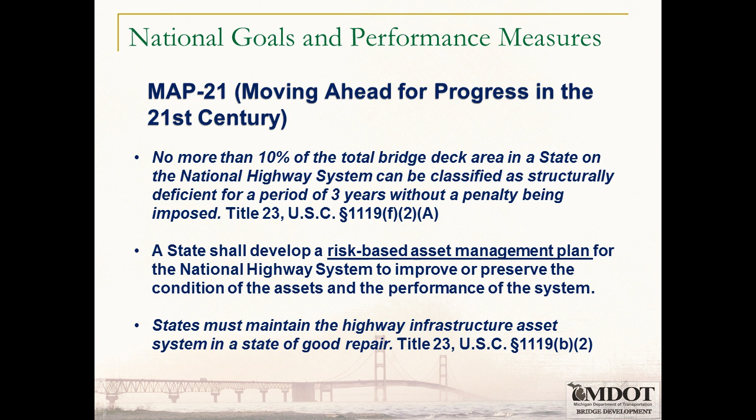And then the terminology: we must maintain our bridges in a state of good repair.

But since FHWA, with these national performance measures, they're going to start talking about fair bridges too. That's really good news, because it's us managing those fair bridges. And that's what I'll be talking about a lot today.

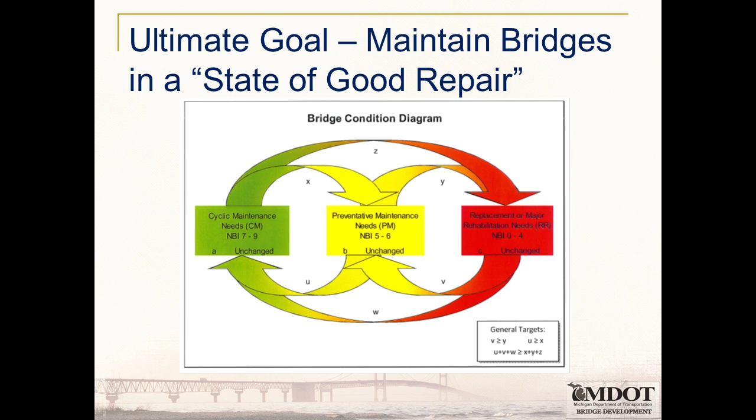I'm going to talk a little bit about how, if you're doing good asset management, someday somebody's going to ask you - you can put the money in the templates and then you pick the projects, and somebody's going to ask you, well, what's your methodology for picking these projects? How are you picking them the right way so it's the most cost effective? And remember, MAP 21 said risk-based asset management.

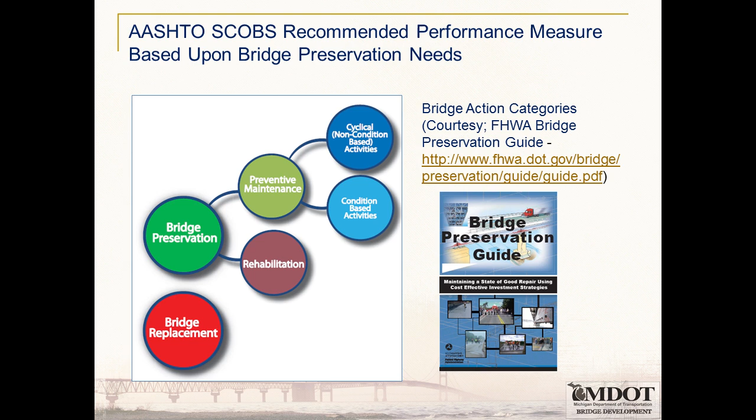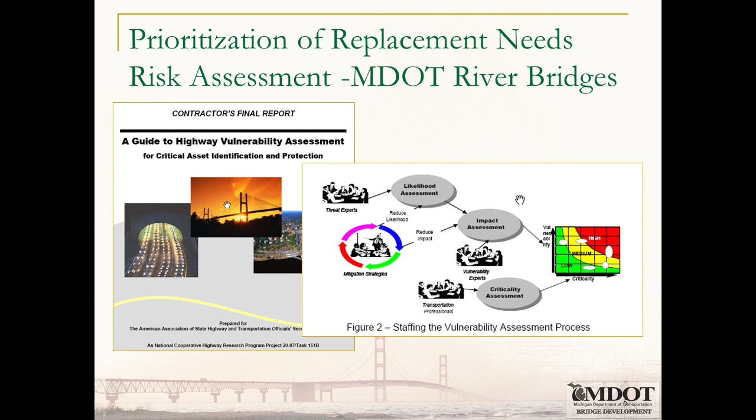So to me, when you talk about rehab replacement needs, risk-based fits in very, very well. This is some of the things we do - we follow the guide to highway vulnerability assessment for critical asset identification and protection. That was an AASHTO guide. I really like it, and it's where you start talking about your asset, its vulnerability and its criticality to the transportation system.

Each year we have a thing called our 5-year call for projects, where we're a decentralized state - we have 7 regions, but we control it centrally by giving guidance and setting goals each year with the regions. We write a call letter, and then the regions pick projects based upon the instructions there.

For our R&R program, one of the things we require, and in the central office we help them out, is for all of our poor bridges over rivers right now, particularly an evaluation for scour, we do an assessment - a vulnerability assessment of that structure. It'll get a score for vulnerability, which includes item 113 scour rating, number of substructures in the water, footing type, skew angle, channel protection, soil type, scour mitigation, overall condition of the structure - all these things that show you if that structure is at risk.

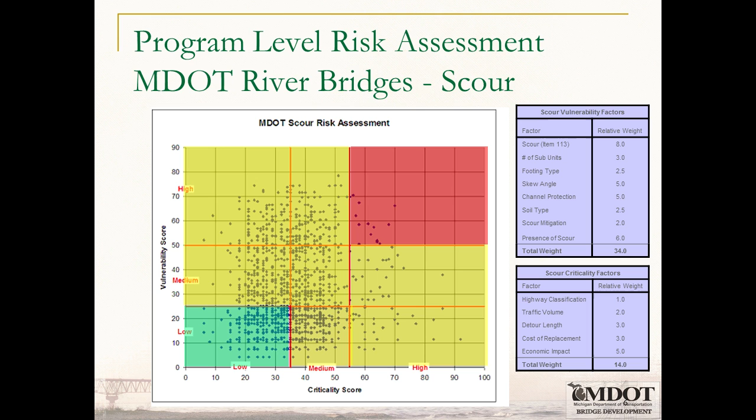And then the criticality score - how critical that structure is to your system. For example, highway classification, traffic volume, detour length, economic impact to the community. So if a structure is rated both highly critical and highly vulnerable, our region has to say, why aren't you working on that? It's really prioritizing that action is taken on those structures to reduce their vulnerability. That's how we prioritize, or partially how we prioritize, our R&R program.

Now let's talk about - in Michigan, 20% of our program goes to preventive maintenance. It has for years. We very much believe in it. It's been a tremendous help in slowing our deterioration rate, which I'm going to show you some charts on. But how do you prioritize PM?

Now, I love to talk about Markov transition probabilities. This is where the geek in me starts coming out. It sounds overwhelming, it might be a little scary, but actually it's super simple, and the way we do it is just so easy. I just want to take a little time to show you how we do it. It's simple counting, and we're doing it with the NBI.

For example, in this slide I'm showing our 2009 and 2010 inspections, and I highlighted yellow our 5s because we're going to be talking about how we prioritize our 5-rated bridges for these PM projects. Our sample size is 904 bridges. Of those, 56 actually had the condition state go up, so we're assuming we did a project, and we pull those out. Out of those 904, 879 when we inspected them in 2010 were still a 5. So our transition probability is 97.23% that it stayed the same.

And so we can do the same thing about the probability - we count the number of bridges that went from 5 to 4 and 5 to 3, and then we have corresponding transition probabilities there. Now there's an equation - this is the toughest part, but just a simple equation that converts transition probability to the average number of years it takes to reach the next condition state. So 97.23% equates to 24.7 years. And if you take your NBI scale...

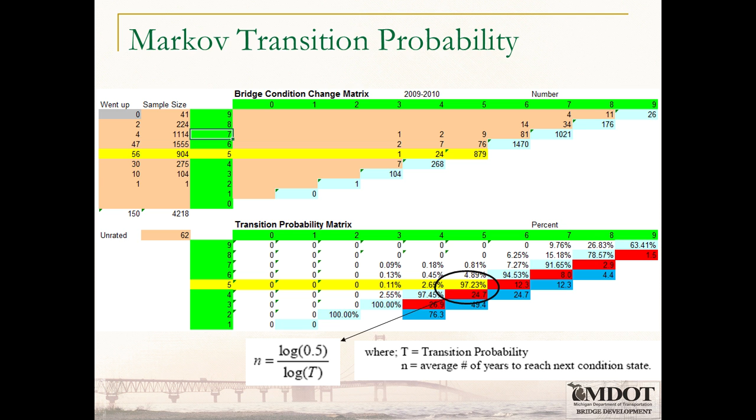...and you do this for each one of those, on the next page you produce a deterioration curve. We've been doing this for years, and I just want to show you a number of different curves to show that intuitively these make a lot of sense. There's things you can do with these curves - one of the things we do is show our time to poor. Here I'm showing the time from a structure being new until it reaches poor - in this case, you can't read that there, but that's 49 years.

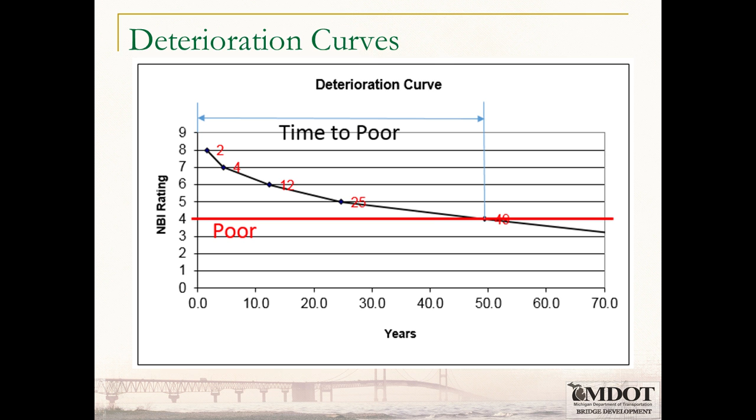So in pavement in Michigan - I think in other states they have a thing they call remaining service life - this is very similar to that. I like the term time to poor because we do have service life even once one of our major components of the bridge does become poor. I'm going to show you a few examples of how we've been doing with this. 5 years ago, and it's available on the internet, we have a report where we were curious to see how our reinforced concrete decks with epoxy-coated rebar was doing.

We did that report in 2010. I was pleasantly surprised that we started doing epoxy-coated rebar in 1981. We could not find a single bridge deck surface that had deteriorated to poor. Because we do both an NBI rating of the deck surface, the bottom surface, and an overall deck rating. The deck surface deteriorates the fastest, and we couldn't find a single bridge where the deck surface had become poor. So that's good news, but our transition probability curve couldn't really extend beyond that point, other than drawing a dashed line, because we simply didn't have the samples after all those years.

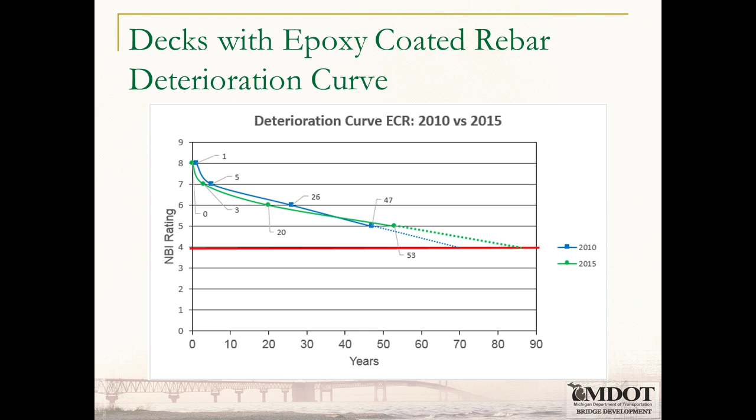So we just repeated it this spring, and in blue is 2010 and green is 2015. There's two things I find kind of cool here. One is the repeatability of using these transition probabilities to do this curve, because its 5-year average was like 2005 to 2010 and 2010 to 2015. Look how similar the curves are. And the good news for us, we still don't have a bridge deck with epoxy-coated rebar that has gone poor. I know there's issues and controversies, and some in Florida and Virginia are saying dire things, but we're certainly not seeing it. So that's good news, and it's also a good use of this curve, which I really like.

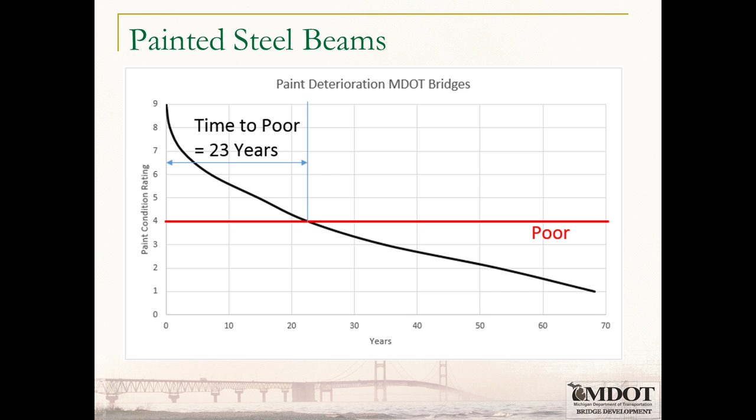We are doing these curves for a whole bunch of things. I won't bore you by showing too many of them, but another one is for painted steel. We have a paint rating, an NBI 0 to 9 rating for the paint system on a bridge, and we find that the time to poor for painted steel beams is 23 years. Again, intuitive—you look at that and say, yeah, that makes sense. I can believe that.

Now for our three major elements, we've checked from 2000 to 2004, 2005 to 2009, and then 2010 to 2014, and drew these deterioration curves. Now here's the good news—this, more than anything, I think, shows the value of preservation, because you see a deterioration curve in 2000 to 2004 in red, then in purple, 2005 to 2009, 2010 to 2014. As we've gotten better at preventive maintenance, our deterioration rate has clearly slowed, and that's really good news. I was really happy to see that.

This is something we should continue to do. In fact, in Michigan, some of our priorities have changed a little bit, and we got some big mega projects that are kind of gobbling up all the money, and our PM program's taking a hit. So it'll be interesting to see in the next 5 years how it shows up in these curves.

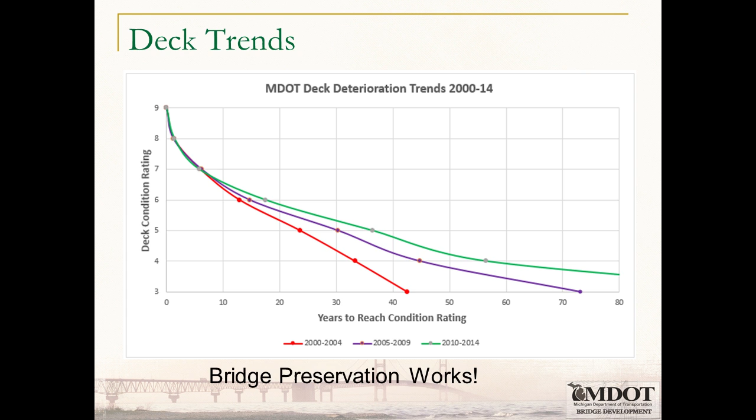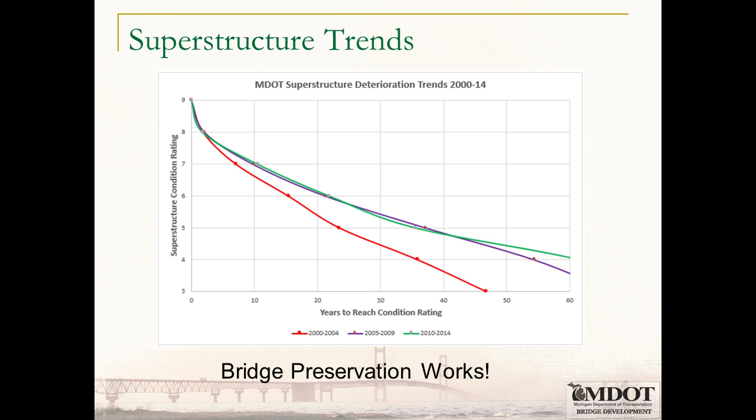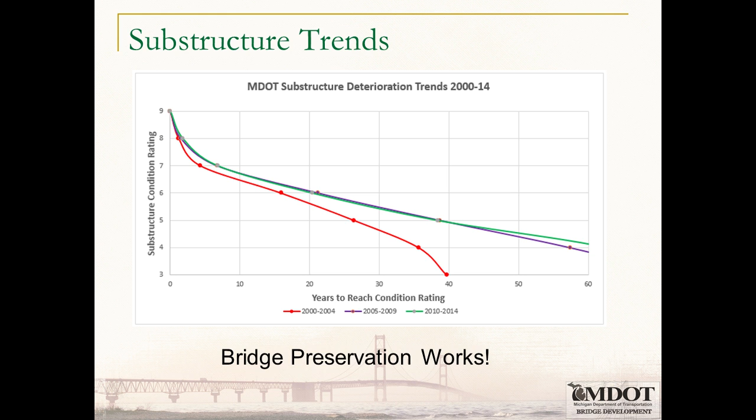The same type of thing was done for our superstructure. We made quite an improvement in our deterioration curve from 2000 to 2004, and it's been holding steady since in 2009 and 2014. A similar thing for substructures. So again, super simple thing to do—anybody who's got your NBI ratings can do this. We're happy to share our spreadsheets on how we do it. You'll find it's really quite easy.

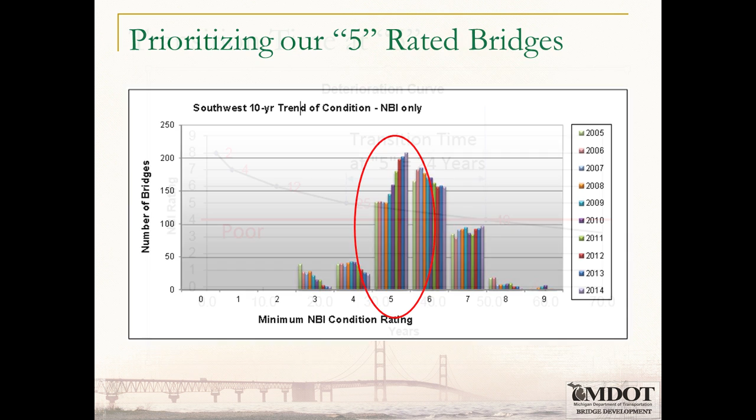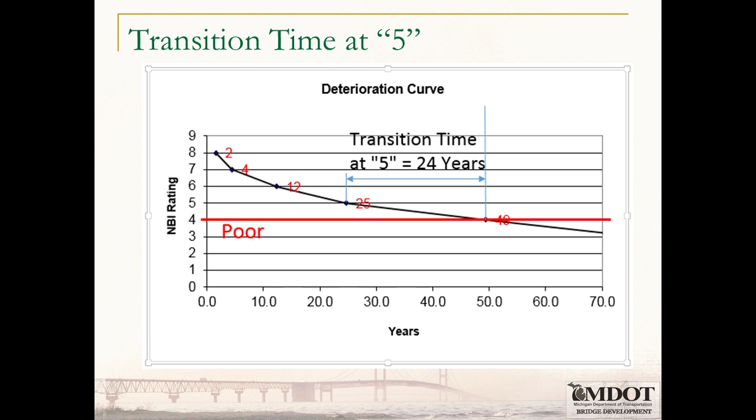Now, here's how we developed a method for time to poor, for prioritizing our PM projects. You can see our transition time for our 5s is about 24 years, shown right here. So a bridge will linger in a 5 condition state on average for 24 years.

Now, what we did—and it gets more complex than this—is we took all the different types of decks, the different information we have, some of it being element level, and tried to estimate how long that particular type of deck will linger as a 5. How you use that: say you have a bridge that became a 5 in 2005. In 2015, our current year, we know it's about 24 years before it becomes poor, so we can estimate for this particular bridge you've got 14 more years before it becomes poor. So the estimated year the bridge will become poor is 2029.

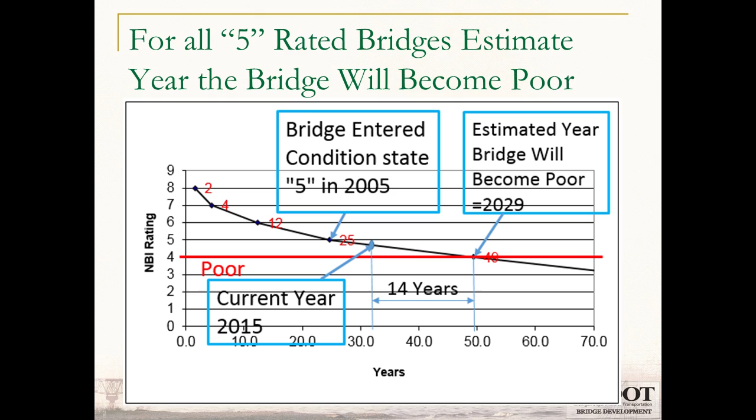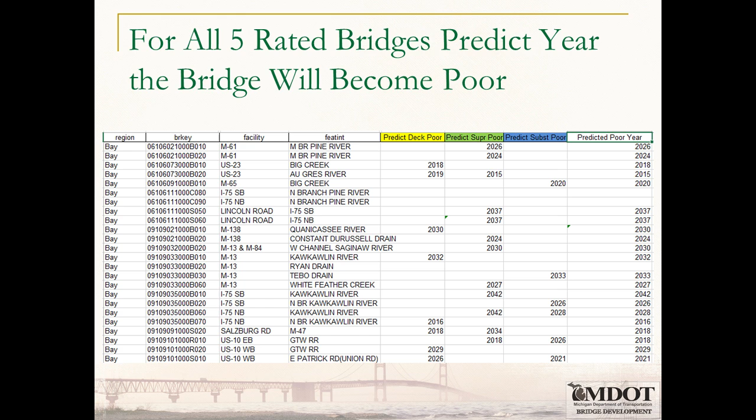For each and every bridge that's rated 5, we have subroutines that will calculate the predicted poor year. In our call for projects, we give this information to our region bridge engineers, and then they can sort it and identify the bridges that are going to turn poor soonest, so they can prioritize their preventive maintenance on that.

Again, it's a tool for our region bridge engineers as part of the call for projects. They follow our guidance in the call, and we provide them the management tools which I just showed you. But very frankly, that's just a tool they use. Another very big part on how they make good decisions is their personal knowledge of the bridges and inspector recommendations.

Another thing we ask our bridge inspectors is if you're rating that bridge and one of those elements is on the verge of becoming poor, report it to the region bridge engineer, and they get it right on a list.

Of course, what's the value of prioritization? It does steer you in the right direction, but the fact is when we do preventive maintenance projects, we do them along corridors, so we might do 10, 12 bridges. And of course, we are and always will be little brother to the road program. So we need to coordinate, and there's a lot of efficiency. If you've got traffic control to take care of the roads out there, you're going to go out there and do PM on the bridges.

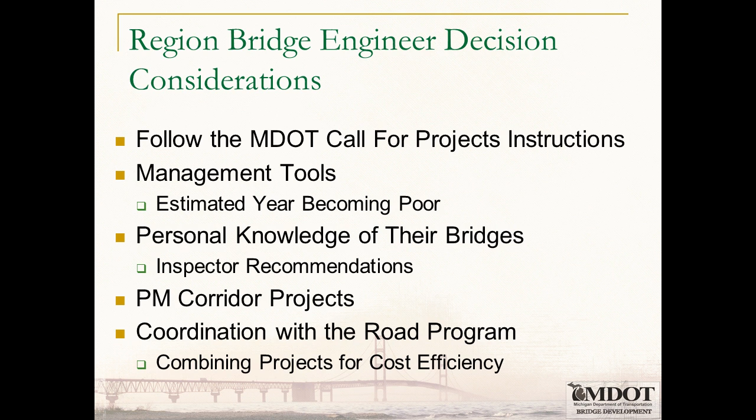This is an example again of our Southwest region. What they provide as part of the call for projects is they count up their bridges that are poor, and then the predicted ones that are going to become poor based upon the tools I've shown. And then they do evaluation on what they can do with these, which ones they just can't get to, and in the end, at the end of the call for projects, they show us what the end outcome is from their program.

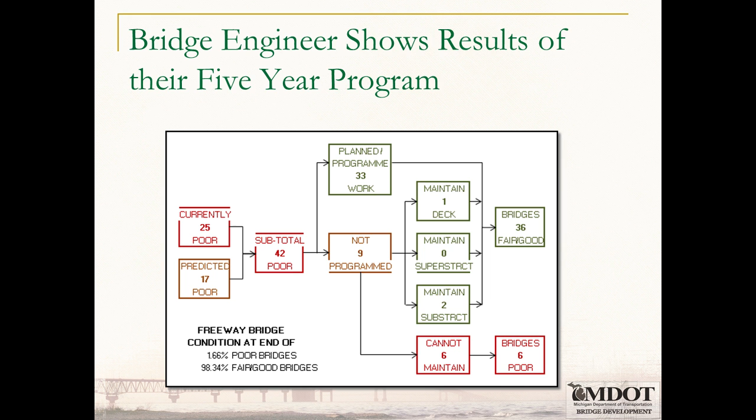Now, what I really like about this program is all of our region bridge engineers come into the central office. They do a report that they hand to us - that's their call for projects and selection of the bridges. And the coolest thing we do now, it's not reviewed by me. I don't even review it anymore. It's reviewed by their peers, the other region bridge engineers. And you should see the really good conversations that they have and how much they learn from each other.

Finally, I want to give special thanks to Bob Kelly, who's our bridge systems management engineer and the real genius behind almost everything we do. Bob's not a big one for getting up here and speaking, so I tend to take all the good stuff he does and come present it. But thank you, Bob. And with that, I'll be happy to answer any questions.

David, that was a good presentation. Those charts look like they're based on NBIS. Did you find a way to convert them to element inspection yet? Or - oh, well, we do similar charts, and of course the AASHTO bridge management software is going to be doing this very soon. But we do similar charts using element levels. It's a little bit more challenging for some of the elements. I find it's easier to do these types of things when the quantity's each, but when it's lineal foot, it's just a little bit more challenging, but very doable. And we do those charts too.